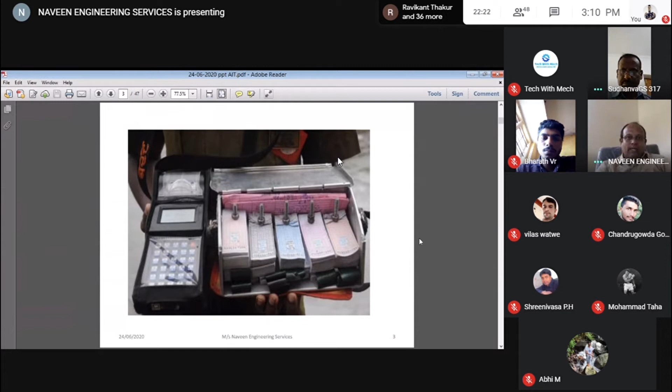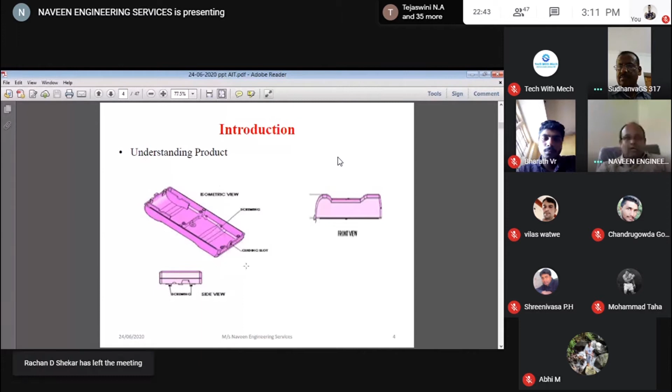This is the client's product. Once you go through this client product and draw the 2D and 3D, then you have to understand the statement of the problem. The client will give different statements for the problem - my client gave the statement: design and manufacture of a single cavity mold for the component of base cover, using concurrent engineering.

In engineering, there are two types. One is traditional engineering and another is concurrent engineering. In traditional engineering, there is a barrier between one department and another. Whereas in concurrent engineering, there are no barriers, it works as teamwork. That is what we call concurrent engineering.

Using this concurrent engineering, the client asked us to develop the ABS material. All of you know what ABS metal is. There are so many plastic materials: PLA is there, nylon is there, ABS is there, PPL is there. So many plastic components are there. In this case study, we have taken this ABS metal.

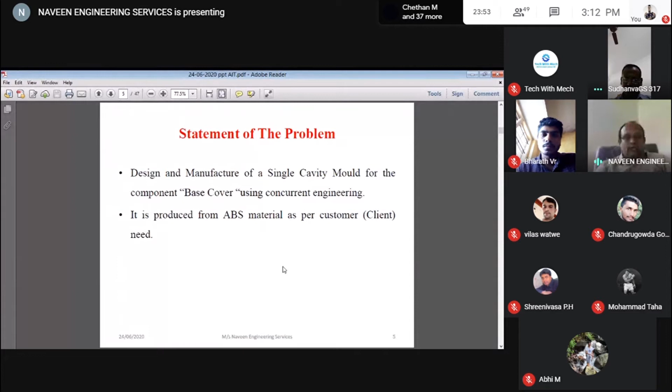Now, what is ABS? What are the features of ABS? I'm going to show now. But before that, before you manufacture any product, you have to understand the geometry of the component. Every individual component has a different geometry. To achieve the correct geometry, we need to follow guidelines.

One is the design consideration. You have to understand the number of cavities there are, whether it is single cavity, 2 cavity, 6, 4, 24, up to 38 cavities we can manufacture. The second thing to understand is the straight parting surface. Next, what type of pin ejection should be used. The fourth one is molding machines available.

There are a lot of machines available in the industry, maybe in a traditional way or non-traditional, non-concurrent engineering way. In traditional engineering, you have seen lathe machines, drilling machines, parting machines, all this. But now technology has entirely changed. Now there are CNCs, maybe 2-axis, 4-axis, 5-axis, 8, 12, 15-axis. This is all available now.

Once the availability of machines is considered, then you go for the design and fabrication of the tool. After the design and fabrication of the tool, you have to consider what quality assessment should be taken care of. Being a mechanical engineer, you should understand the geometry of the component, any product, any component.

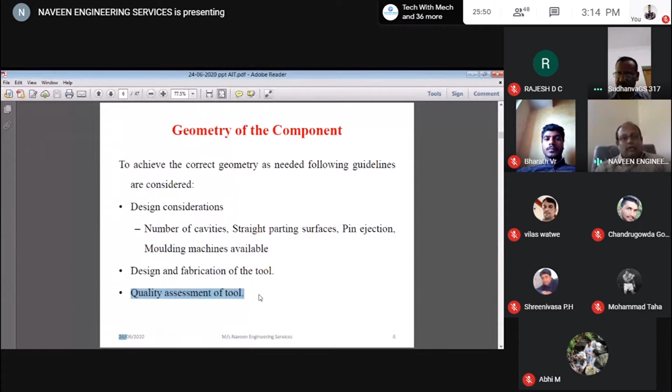The next slide is about the design objectives. In the industry, when you take any client requirement, there are three important things you should understand: what type of tool you have to use in the industry, what type of machine you are using in the industry, and what availabilities are there in your premises, meaning in your industry. This is the most important thing you have to keep in mind.

Being a mechanical engineer, for any object, any plastic injection mold, any components related to plastic injection mold, the design objectives are: first, design the tool as simple as possible. Second, design for manufacturability, that is, reduce the manufacturing lead time. Lead time is nothing but the duration of manufacturing the product and delivering it. How much you reduce the lead time is a benefit for your organization and for your client also.

Next, you have to understand what ABS is, its physical properties, its mechanical properties, and what characteristics will be molded in the molding process. After that, you have to design the product to achieve the component performance. These are the four important things you should consider in product designing.

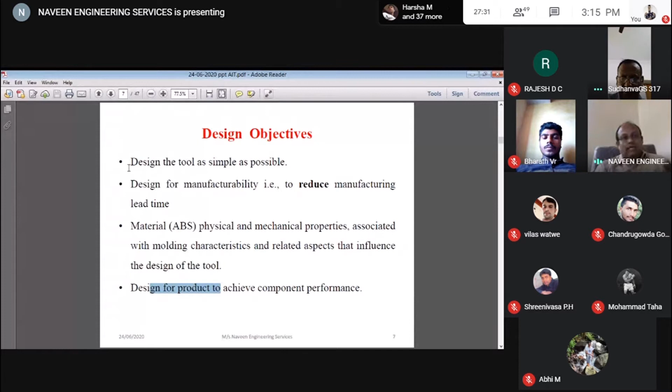For any new product development, whether it's new or old, or maybe you want to do re-engineering, you have to consider all these parameters for plastic injection molds. For different tools, like press tools, we have different design structures, tools are different, everything is different. But in my case study, I'm taking plastic injection mold. So after this design objective comes the scope of the work.

So we are doing one product, or component. What is the scope of this project? First, analysis of component geometry, which enables the choice of parting surface. What is the feeding, the injection location, where should the injection location be located? Maybe you have seen in the foundry, you are using runner and riser, right? Where you are locating the runner and riser. Same here, we are locating the injection pins or feedings, and ejection techniques. What ejection techniques are there?

Next, after that, you have to consider the design of injection mold and tools. And after that, you have to study the physical component of any property. Take an example: if you want to buy an iPhone or any Samsung mobile, you see the features of those mobiles, right? Why? Because what are the features? Any new features available? Whether the features cope up with your work, the technology and all this. In the same manner you should consider the selection of material. You should understand the physical characters of the material, the mechanical properties and process properties of the tooling material, and its influence with the molding material.

And finally, after doing all these first, second, third parameters, you have to do the tryout of the tool and correction of molding defects. What is a tryout? Maybe the word is new for you, but in the industry we say tryout. Tryout means trial and error of any product. You take any product, you have to check the parameters, whether it is matching with the drawing or not, and everything. For that reason we do this tryout, to find out whether the drawing is matching with the tool or not. And if it is not matching, there are some corrections you have to do in the molding defects. This we call a tryout.

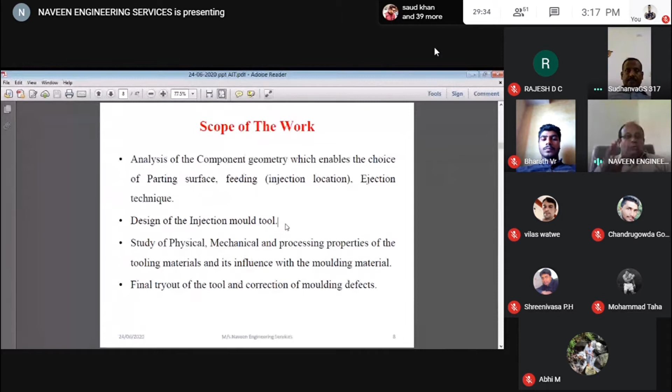So after this scope of work, you have to decide what material you are going to select. In this case today, I have selected ABS. Why I selected ABS? Because of the low density compared to steel; second, good surface appearance, the aesthetic look is very good; good resistance to abrasion, resistance to flexural fatigue, good aesthetic and good ergonomic designs, and ease of manufacturing. It depends upon the client requirement. You can take PLA also, any plastic materials also. In this case study, the client requirement is ABS. ABS has low density compared to steel, good appearance, good aesthetic look, good ergonomic design and ease of manufacturing.

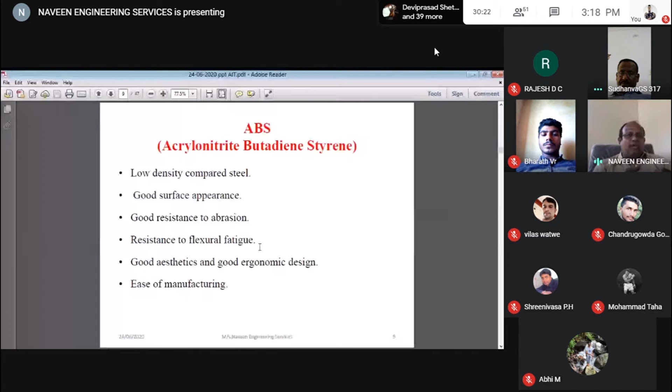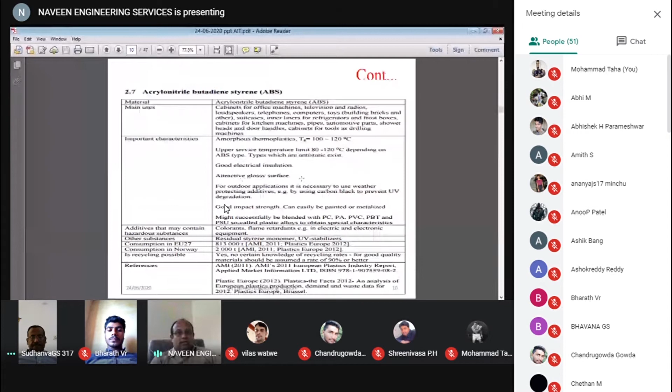So after the selection of this material, you have to go for the properties of ABS. Why is ABS so unique in this product? The main uses of ABS are cabinets for office machines, televisions, radios, loudspeakers, telephones, computers, toys, inner liners for refrigerators, cabinets for kitchen machines, pipes, automotive parts, etc. All these components are nothing but ABS material. Electrical insulation, attractive glossy surface. For outdoor application, it is necessary to use weathering additives, for example carbon black to prevent UV degradation.

Once I select all these parameters, then you have to go for the standard. I mentioned here 813,000 t AMI. This is the European standard for 2012. And the same thing for 2000T AMI 2011, the plastic European standards. For any selection of material, you have to consider your standards. You can't deviate from the standards, because being an engineer, you should follow the standards. Once you follow the standards, you have to implement those standards in your product.

So after the consideration of the physical properties of ABS, you have to understand what tool you are using. In mold manufacturing, usually there are 4 types of most important materials in the plastic mold. One is mild steel, we call it ST42. This is the grade. And one is hot die steel, grade H13, T35CR5MOV1. These grades are not mentioned in your textbook.

First and foremost, the practical thing and the theoretical thing are entirely different. Try to understand. So many guys will say, sir, I studied some standard metal, I studied the design engineering aspect. See, practical is different, and theory is entirely different. So in practice, we are using mild steel, the grade is 42. Sometimes in your textbook it is mentioned or not, I don't know, but usually you have to follow the standards.

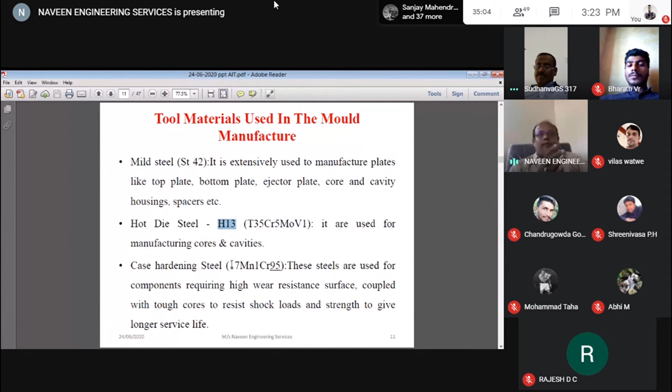See, top and bottom dies are molding to each other. When the load is applied on both sides, it should withstand the loads. For this purpose, we are using the case hardening steel. After selection of all these tool metals for the plastic injection mold, then you have to consider cavity layout. So, what is a cavity? First, understand the cavity.

See, in the MP1, MP2 subjects, they mention cavity 1, cavity 2. Cavity 1 means single cavity, only a single component will be manufactured per cycle. 2 cavities, 2 component pieces are manufactured. Like that, there are 6 cavities, 18 cavities, 28, 27, 25 cavities. There are n numbers depending on your production capacity. In this case, I am using the single cavity layout. For a single cavity layout, what are the parameters I should consider?

First, the general layout of the cavity is decided by the type of machine and its specification used for the production of the parts. Second, the parting line should be considered in such a way that the molding can be ejected easily once it is molded. Third, the cavity should be placed in such a way that when connected with the sprue, the runner and the gate ensure uniform filling of the impression. So for a single cavity, these are the most important parameters to consider in designing the cavity.

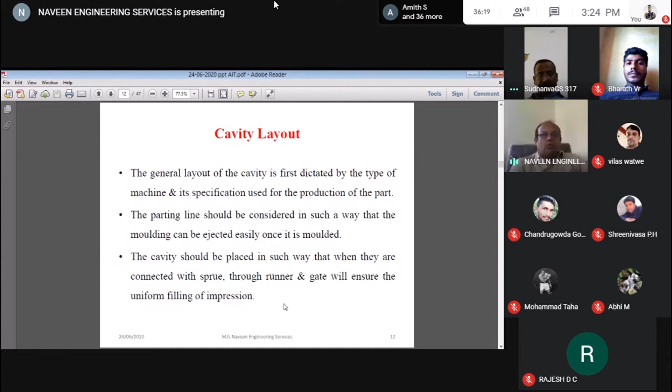So being a mechanical engineer, you should understand what is a cavity, what is the tool, and what is the machine. Once you go through all this process, then your process stands here, methodology. See, we don't call it methodology, we call it a route map of a product. In industry, we call it a route map of a product, but in your terms, we call it a methodology.

Maybe you can learn CATIA, that's quite enough in the industry. Everywhere you go, in any industry, normally the client will ask only for CATIA and AutoCAD; only these two softwares are important. Sometimes they are going to ask for Solid Edge, ANSYS, right? All these things depend on your work conditions. So here I am using solid modeling, by using CATIA.

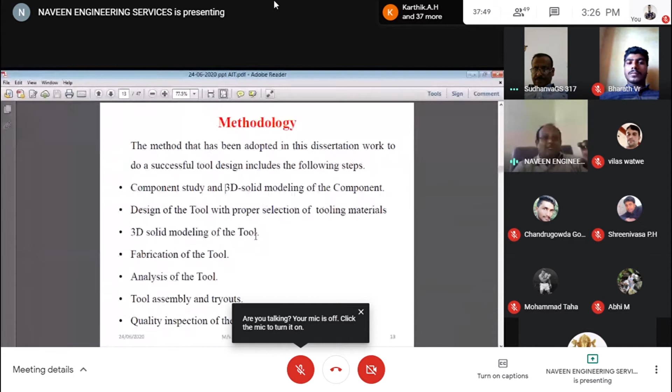The next is design of the tool with proper selection of tooling metal. Whatever tooling metal is selected was already shown in the previous slide. The next is the 3D model of the tool. Once you draw the 2D, you have to convert the 2D into 3D, where you can analyze very easily whether the components fit in those parts or not, right? Once the 3D modeling is over, then you go for the fabrication of the tool.

This plays a very important role here. Being an engineer, you should understand what the fabrication of the tool is, and what difficulty you are facing in the fabrication of the tool, right? After fabrication of the tool, you go for the analysis of the tool. After analysis, you have to go for the tool assembly and tryouts, and then go for manufacturing the components, right?

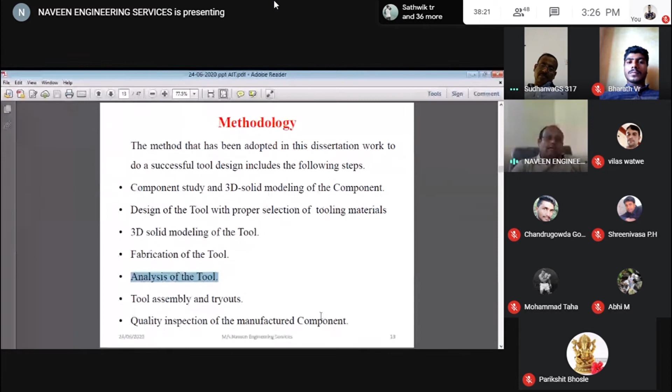In a simple way, when you get any order, right? Maybe you're seeing this. That's it. Zoom it. Yeah, can you see now? A bit. Now? Yes, sir, it's clear.

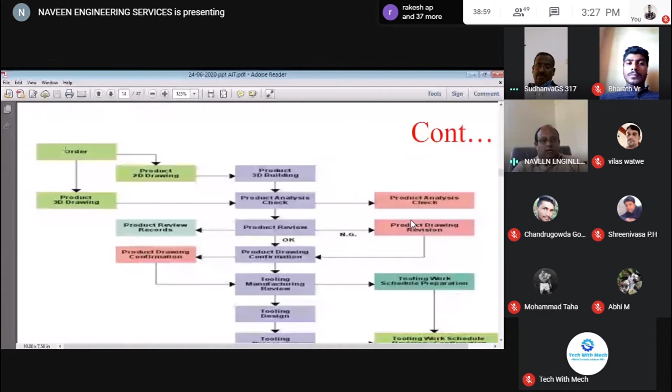Usually when you take any new order, any new product development, this is the procedure followed in the industry, right? Many of you know what an order is. When you receive the order from the client, first you have to do the 2D and 3D drawing. This is the first and foremost thing. Once you complete the 2D and 3D drawing, it goes to the product 3D building, right? The assembling section, meaning the drawing in AutoCAD or CATIA software. After the 3D building, it goes to the product analysis check.

What is the check? The product analysis check is where you can analyze the product view, whether the dimensions are correct or not, whether it is according to the client requirement or not. You can analyze here, right? Once the product analysis check is done and it comes out okay, then you go for the product review. For the product review, you start from the order.

Sometimes the client will say this is the dimension you should follow, right? This is the tolerance you should follow. So this is the order, right? The order is nothing but the client requirement. Once the client requirement is completed with the 2D and 3D, you should check with the 3D building, and after that you have to do the analysis check. Once you check all these four processes, go to the product review. Once the product review is completed, it goes from left to right.

Towards your right side there is the product drawing revision. On the left side you have the product review records. These records are matched with your drawing, and the product drawing revision is matched with all these parameters. Once these two matchings are over, it comes to the product drawing confirmation. This confirmation department will give the confirmation to the tooling manufacturing department, where you can purchase the tools, right?

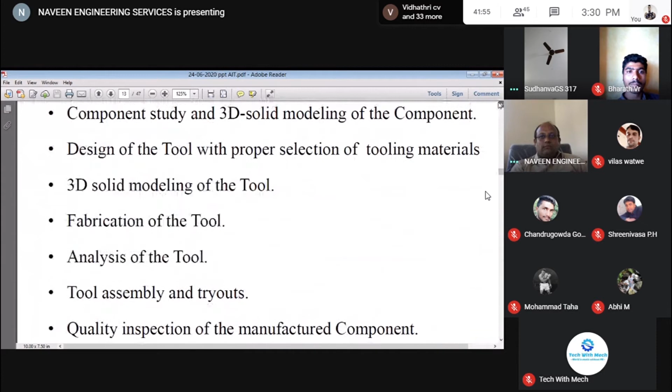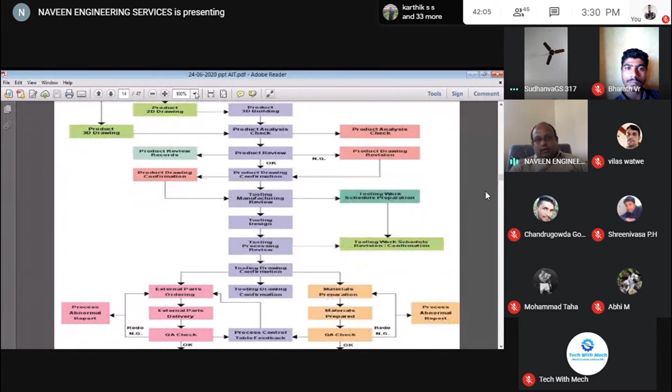Then it goes to the tooling work schedule. This tooling work section will be helping out or supporting you for developing the tool. Once this tooling work schedule is completed, it goes to the tool processing review. Once the tool processing review is completed, it comes to the tool drawing confirmation.

So once the tool drawing is confirmed, again we have two divisions. One is for the external parts ordering, one is the material preparation. So material preparation can be done inside your organization, okay? But whereas external parts ordering should be done in outsourcing. See, sometimes the tool may not be available near your premises. Sometimes you order in Bombay, sometimes you order in Coimbatore. It takes a lot of time.

You should understand what is the scheduling time and how much time it takes to deliver your product in your premises. Once it is confirmed, then you go for the material preparations. After that QA check, once you receive it here internally; the same thing happens for the external. Once the part is received from the external, you have to check the drawing parts, then you have to check the quality. So after the quality is over, then you go for manufacturing.

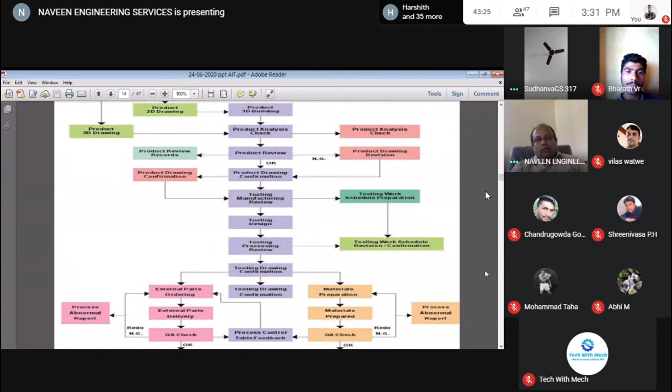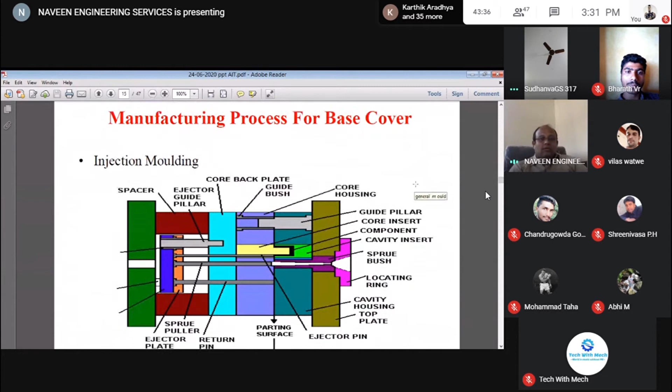This we call a road map, or sometimes we call it a mapping. Once the mapping is over, the next process is the manufacturing process of the base cover. See, this is a tool used in CATIA, CATIA V12 software. Here we can clearly understand what types of guide pillars are there, core back plates, core housing, guide pillar, core inserts, components, cavity, sprue bush, locating ring, cavity housing, top plate, and ejector plates, everything is here. You can analyze how many components are to be used to manufacture this product.

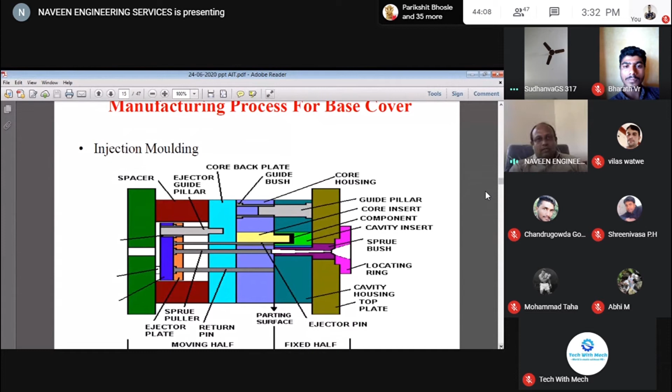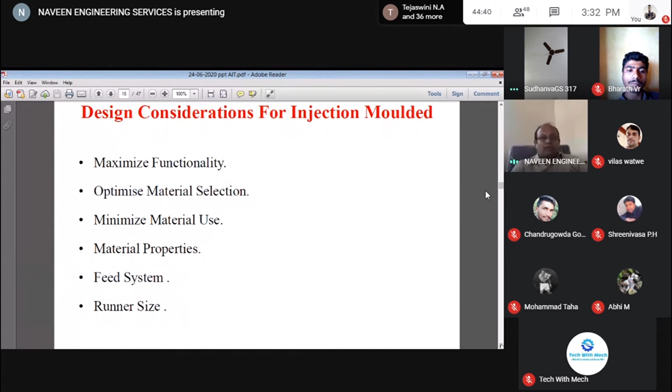Once this manufacturing process of base cover is over and the drawing is finished, then you have to analyze the design considerations of injection molding. What are the design considerations? First is maximum functionality. Second, optimize the material selection. Next, minimize the material use. Next is material properties, feed system, and the runner system, where the runner and gate will be. Once this design consideration for the injection mold is over, the next stage is mold construction. This is the cut section of a mold.

Can you see it? Rashid, can you see it? Yes, sir. It's visible. Yeah, it is visible, no?

This is the cut section. See, this one is the top one, this one is the bottom one, and in the middle your component is there. This is your feeder gate, we call it sprue gate. These are the guide bushes. See, this is not mentioned in your textbook. Try to understand, the industry practical thing is entirely different from the theory. In so many textbooks, maybe in MP1, MP2, MP3, these things are not mentioned. But when you come to the practical, you should understand what things are there, how things work with these components, and where these things are to be done.

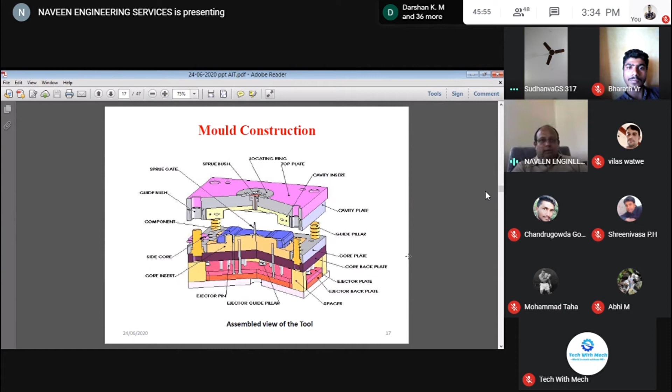See, when you manufacture this component, this is the core, the base cover. These are all the components required. There are so many components. Once you complete all these components, you are ready for the mold. You have to take the cut section and understand whether it is matching the pin or not, whether the sprue is central with the parting or not. Then you have to take care of the core plate, guide pillars, and cavity plate. Once you complete this, then you go for the tool designing.

See, this plays a very important role here. Tool designing is nothing but what quality of the product is there. I'm taking ABS. How much density should I take? Whether 10 grams, 1000 grams, 1100 grams, maybe 3000 grams, like that. It depends on your capacity. And you should know what the volume build-up is and the mass.

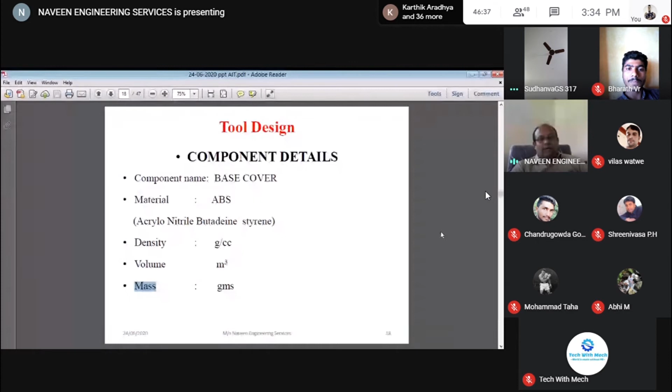This plays a very important role. See, any product you want to manufacture, any plastic injection mold, this density, volume, and mass plays a very important role. So after considering all these three parameters, then you go for the cavity layout. In this case study, I've taken only a single cavity. Single cavity means a single component per shot you are manufacturing. So two cavities, two components per shot. So single cavity.

So for a single cavity, what time should be taken for the melt at the same temperature? What temperature should be taken? Maybe low temperature or high temperature should be considered. Next, flow length, how much flow should be there for inlet and outlet, the distance from one cavity to another cavity, and sufficient space for cooling lines.

See, there are n numbers of cooling lines, different types of cooling lines. In this case, I've taken rectangular cooling lines. Why I've taken rectangular cooling lines is because it cools each and every corner of the cavity very sufficiently and reduces the heat simultaneously. Cooling lines play a very important role in the plastic injection mold.

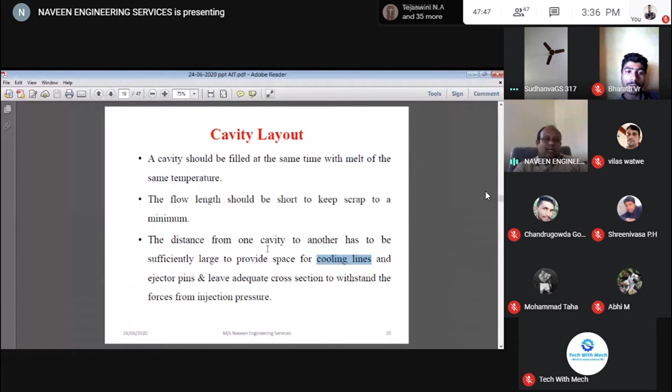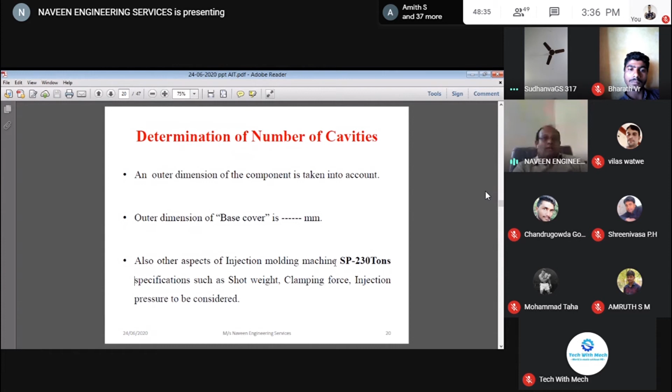See, for the weight of the components, even being an engineer and an entrepreneur, I'm using some formulas. These are all mentioned in SOM, right? So why I'm stressing this is you have to understand the basic fundamentals of each and every subject. It is not like I'm an engineer, I know everything. It is not like that, man. First understand what is W, what is rho and V. You have to understand the formula. Don't mug up the formula during your studies.

Please write down and understand why I should consider density. What role does density play in the weight? Why does volume play a role in the weight? Many students, during exam time, mug up the formula, write the exam and come back. After 1 year, when I ask what the formula for weight is, they're not able to answer it. Mugging is different, understanding the concept is different. So always try to understand the basic concept thoroughly.

If I say weight, why is density considered? Why is volume considered? Why should density and volume be multiplied? This plays a very important role in any product development, maybe in the press tool, maybe plastic injection mold. Maybe today you feel, sir, I'm an engineer, I can go and work in any industry. If you work in any industry, you should understand the basic formulas. Once you understand them, it is easy to develop the product. Otherwise, it's very difficult. You can't go open your textbook to see what formula to use, because your lead time is very short.

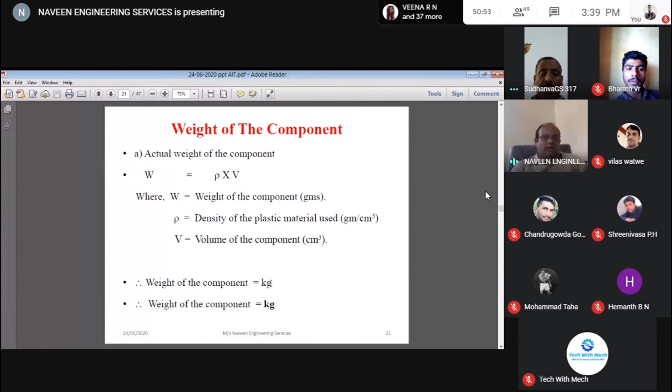Once you consider this weight component, the next cycle is weight of the mold molding weight. Molding weight depends on the weight of the component multiplied by a factor. This factor should already be a standard in the industry, and the weight of the component should already be determined from the previous slide. You multiply those values by the multiplication factor, and after this you come to know the molding weight, whose unit is grams per cavity.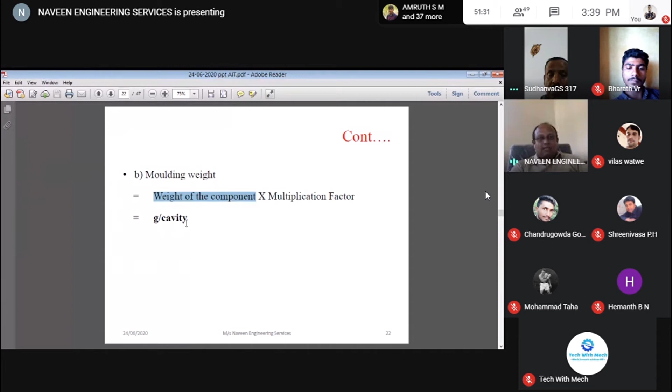Once this parameter is over, you go for the selection of injection molding machines. Selection of injection molding machines depends first on clamping force. This plays a very important role because it plays a more important vital role in the functioning. What is the clamping force? What force should be there, and why? What forces should be considered in the clamping force?

Once you understand the clamping force, then you have to find the projected area of the molding. For any projected area of molding, you take the runner area as a 5% reduction. This is very important - this may not be taught in your subject, but when you come to the industry, this is the standard. You have to keep in mind that 5% of the runner area should be multiplied with the projection area of the component. Then you will get it in centimeters, and then you come to know what the number of cavities is.

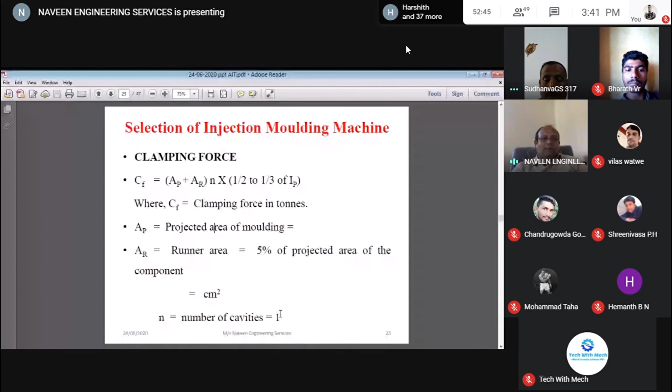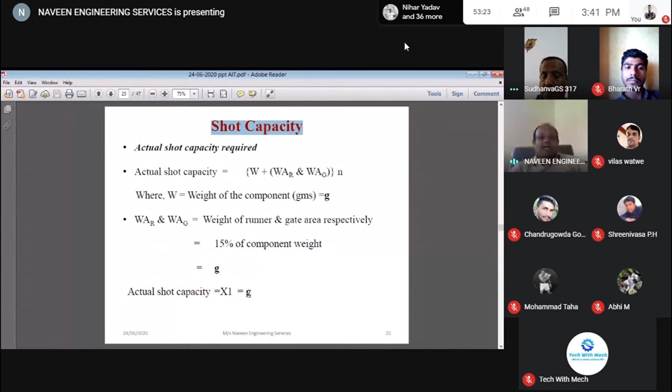Once that is over, you go for the plasticising capacity. What is the plasticising capacity? It's nothing but, in concrete terms, the total heat content thermal capacity of the polystyrene. It is in calories per gram as total heat content. After adding this into your mold equation, you get kg per hour.

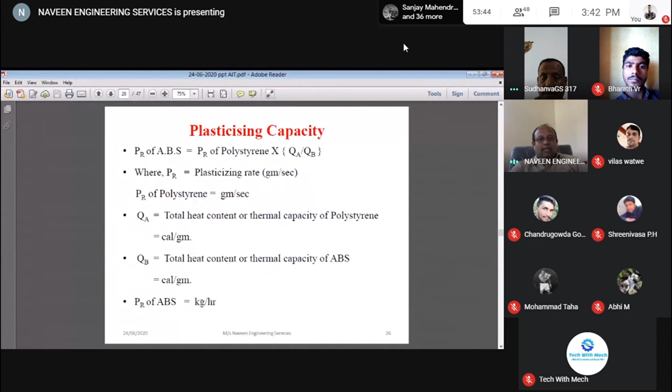Once this calculation is done, you come to know the cavity pressure in megapascal. Before that it is in kg per centimeter square, and after that you have to convert it into megapascal.

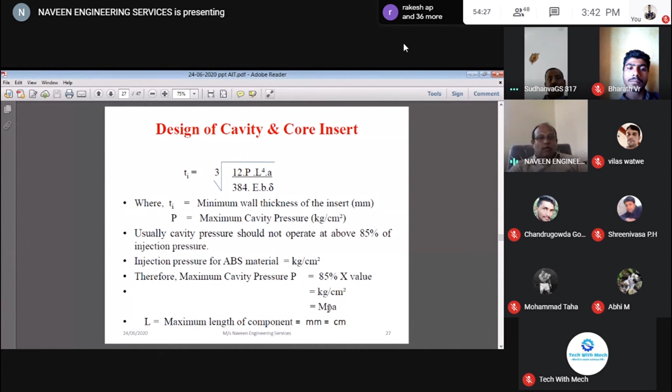Once the design of cavity and inserts is completed, you have to go for the solidifying time. This plays a very important role. Solidifying time is nothing but just like curing your cement - it's as simple as that. Solidifying means nothing but cooling your components.

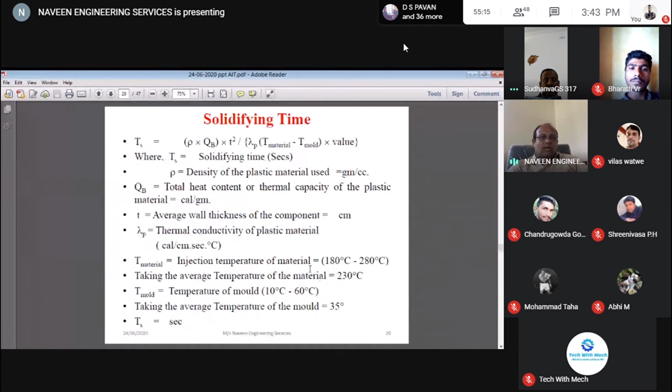What are the equations required for the solidifying time? This is the equation - once you know the solidifying time in seconds, density of the plastic material used in grams per cubic centimeter, and the total heat content, you add all these equations and values, and you get the average temperature of the material. Then you take the temperature of the mold, and the average of this mold will come to approximately 35 degrees Celsius.

Once the solidifying time is over, you go for the cycle time. What is the cycle time estimation? Is it necessary in your project or in new product development? Yes, this plays a very important role. Cycle time estimation depends on your injection time - this is the injection time.

Once the product is living inside, between the top and bottom core, the time will be maybe 6 seconds. After 6 seconds, the product should come out. If it doesn't come out, it will be sticking to the bottom and top.

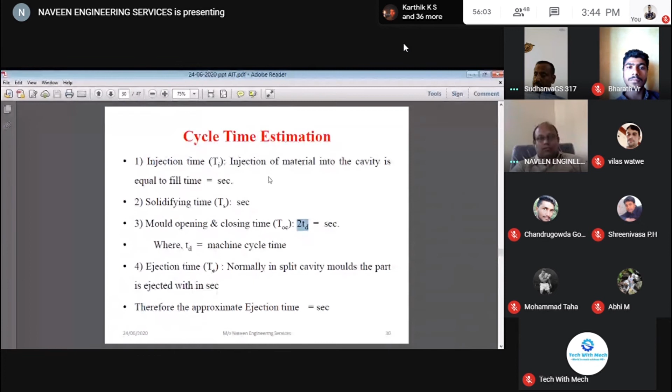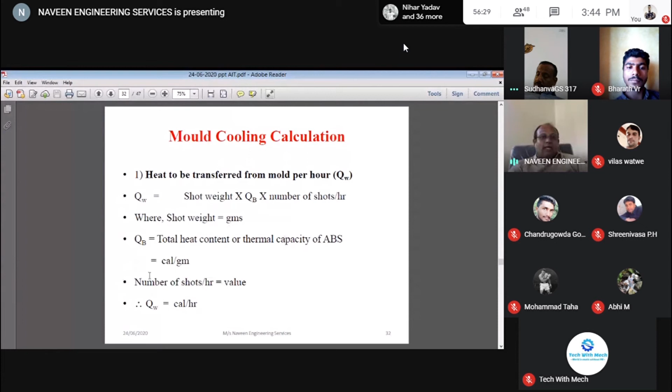Once you consider all this, then you go for the 3D modeling. Once all the parameters are over, then you have to find out whether its core is perfect or not, dimensions accurate or not. Everything should be considered.

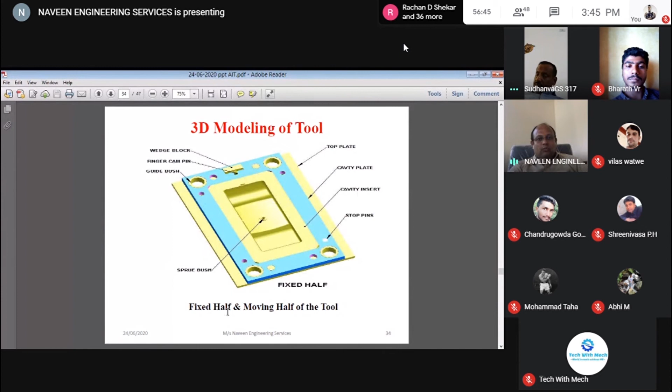This is the fixed half moving part, and this is the moving half of the tool. This will be done in CATIA. This is the assembly of the top and bottom cavities.

Top and bottom locating ring, top plate, cavity plate, core back plate, spacer block, bottom plate, push back pin, and this is the ejector guide pillar and ejector plate. These are the plates - this is the bottom one, this is the top one.

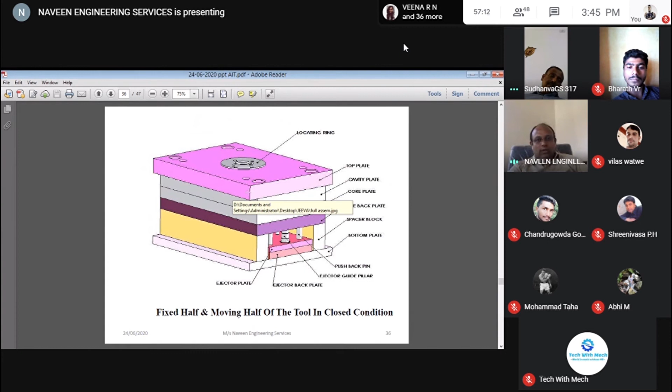Once it's finished, you see the explode option is there. When you explode it, this is a real project - real components will appear like this.

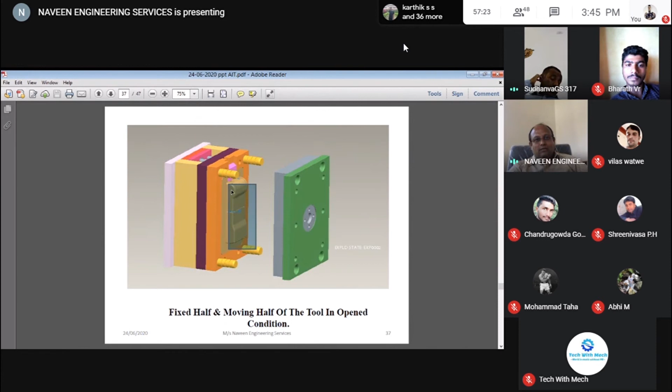After that, the final splitting will be there. See, this is the bottom, this is the top, middle - so many components are there. This is your plastic injection mold product, this is your product, right? You can see it clearly.

See, it is nothing but a die. This is the bottom die, this is the top die - bottom and top. This thing, right? When exploded, the tool, it will be seen in this manner.

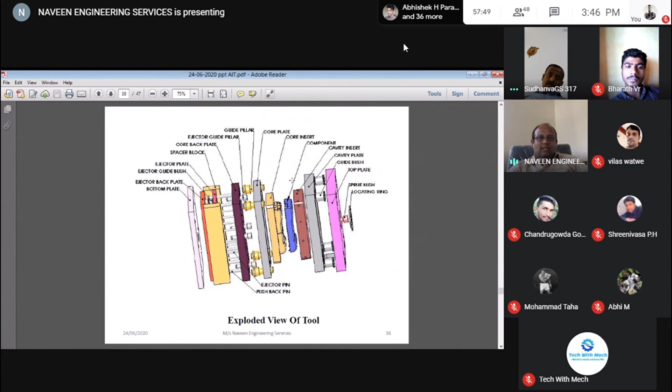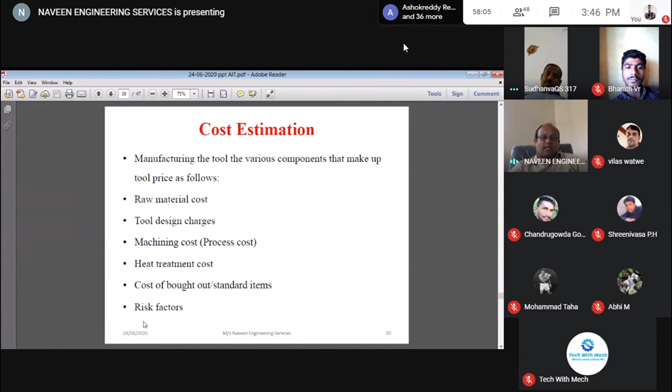Once this is over, then you go for the cost estimation. First, for cost estimation, consider the raw material cost, tool design charges, machining cost, heat treatment cost, cost of the bought-out and standard items, risk factors, and plus you have to take the profit also.

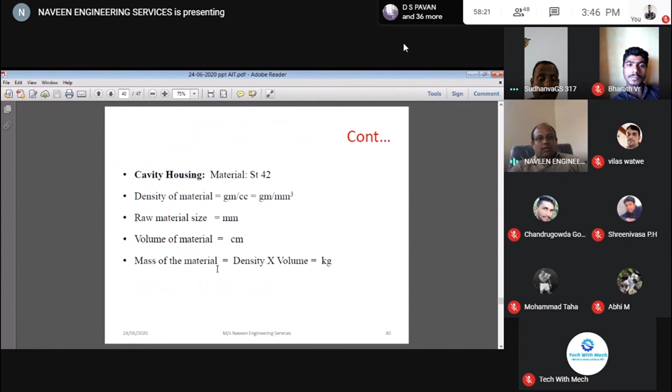After this is over, then you have to go for the characteristic metal ST42. What are the ST42 metal characteristics? Density of material, raw material size, volume of the material, mass of the material. Density into volume is equal to kg - that is the mass of the material.

After the calculation of this total tool cost, then you go for the tool manufacturing, assembly, and trial - trial and error of the tool.

For the tool manufacturing, assembly, and trial, there are three important things. One is the process planning should be there properly. Next is electrode planning should be there. Heat treatment for the specific part and manufacturing - the last parts will come to manufacturing.

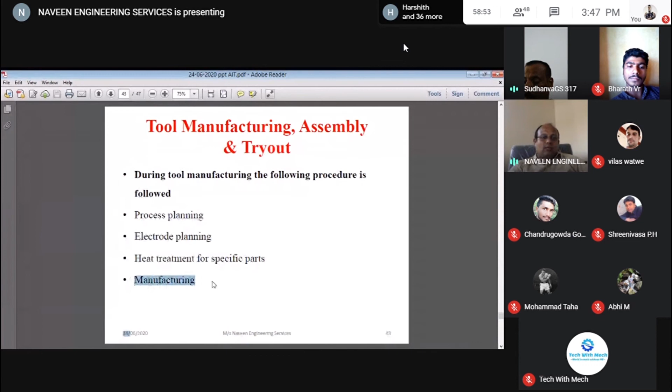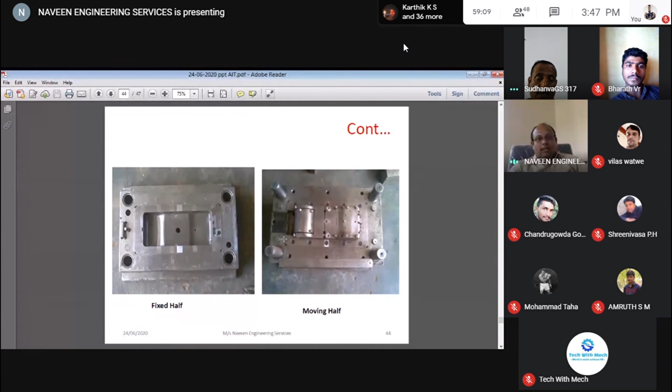Here, this is the tool we are given for the XYZ client for the manufacturing ticket issuing machine, right? So this is over now.